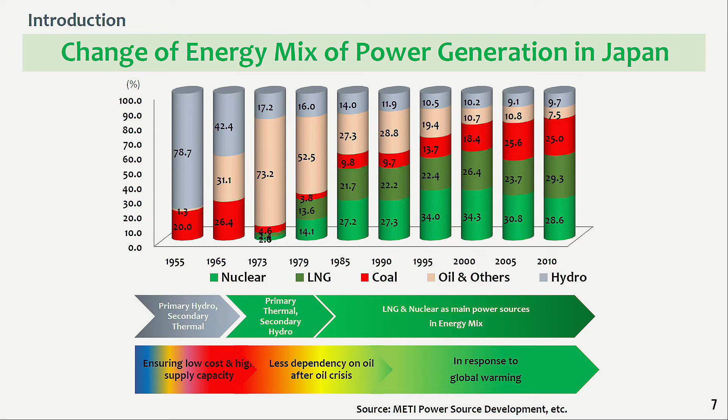And from the late 1990s, the global warming issue came out as a new and common challenge in the world. As a result, the energy mix of power generation in 2010 had reached nuclear 28.6, LNG 29.3, coal 25, oil and others 7.5, and hydro 9.7. I think this figure might be one of the best energy mixes of Japan at that time. This introduction aside, I would like to move to the first topic of nuclear power development of Japan.

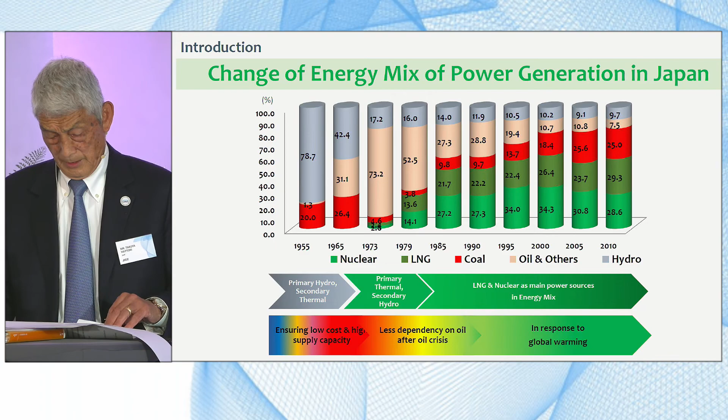That is very important: collaboration of government, industry, and academia. It's very amazing. 1955 is 10 years after the disaster of the atomic bombs in Hiroshima and Nagasaki in 1945. It's very amazing that the Japanese general public accepted to officially start nuclear.

This slide shows a schematic overview of the history, focusing on the number of nuclear power units every 10 years from 1960 to 2010. You can understand that Japan has steadily and smoothly developed nuclear power within a short period of time, and the severe nuclear accidents at TMI and Chernobyl did not affect the nuclear development program in Japan so much.

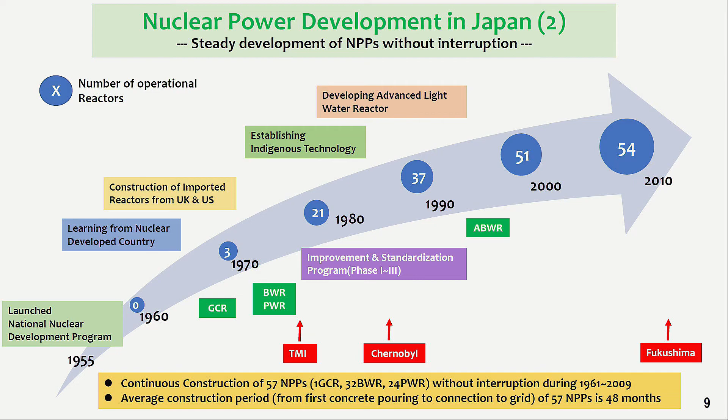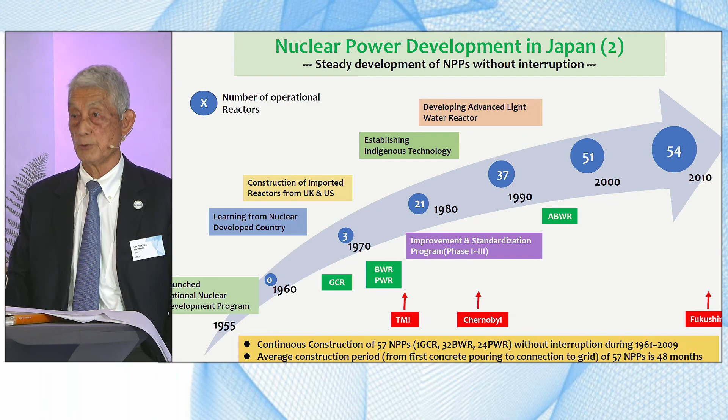Here, I'd like to stress the following 2 characteristic points of nuclear power development in Japan, shown at the bottom. The first is the continuous construction of 57 nuclear power plants without interruption. This is a very rare case in the world. And the second is that the average construction period of the 57 nuclear power plants is 48 months. This is very short compared with other countries. I'd like to show the comparison in the next slide.

As I mentioned in the previous slide, the construction period of nuclear power plants in Japan is relatively shorter than that of other countries. This slide shows the comparison of construction periods of major nuclear countries in the past, based on the IAEA database. Because of the time constraint, I won't explain in detail today, but I may have a chance in the future to talk about why Japan is shorter than other countries, if you are interested in this matter.

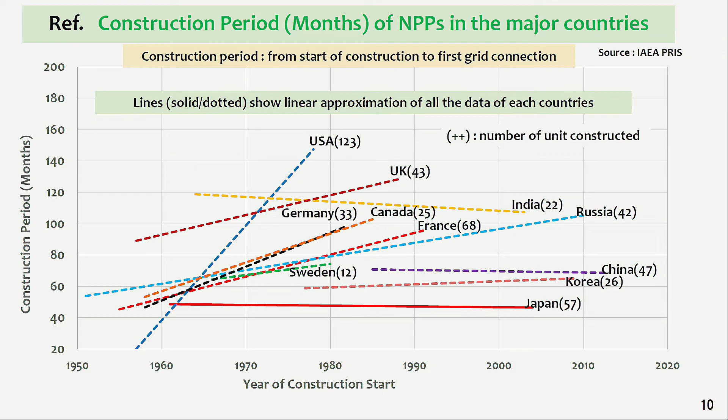In addition to the previous slide, I'd like to show other data on the construction period of Generation 3 and 3+ reactors, which started operation recently. As you might know, the most important challenge and risk of new reactor construction is to prevent cost overrun due to delays in the construction schedule.

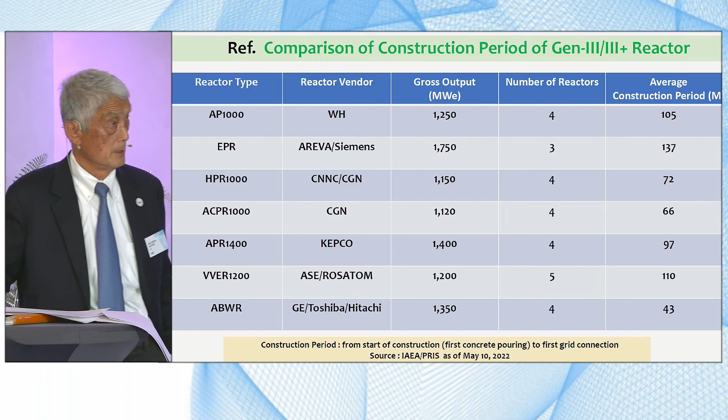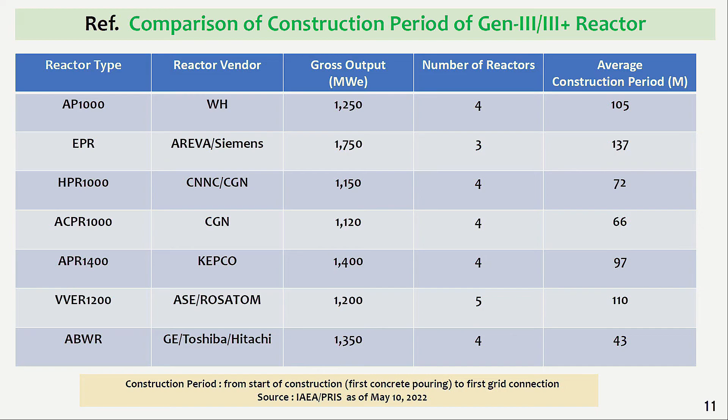Until now, the number of reactors of each type of Generation 3 or 3+ is limited, as shown in this slide. However, we have to realize this reality, and the world nuclear community has to continue to make efforts to shorten construction periods as much as possible. Very unfortunately, the AP1000, EPR, Hualong, ACPR, APR1400, and VVER are all a very limited number, but with a very long period of time. But in the case of the ABWR in Japan, 43 is amazing. I can show the reason why, but today I'm not talking about that.

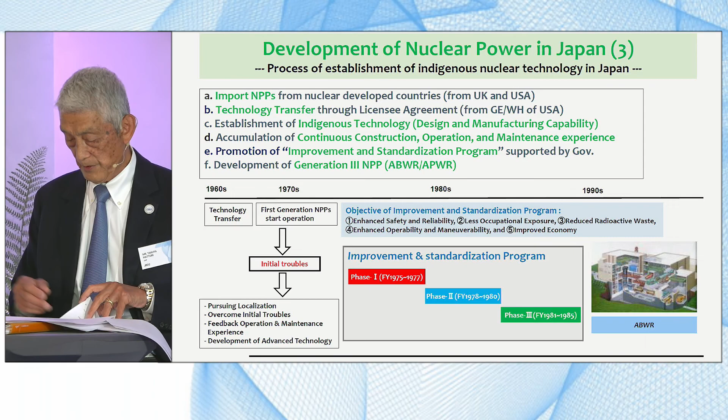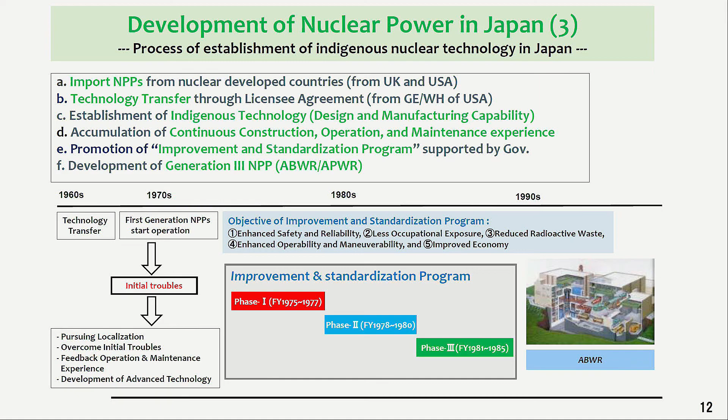This slide shows the process of establishment of indigenous nuclear technology in Japan, with the strong support of the government and close collaboration between government, industry, and academia. Initially, nuclear technologies were imported from nuclear developed countries like the UK and the United States. And then these technologies were customized, improved, and transformed into indigenous technologies through Japanese operation and maintenance practice. I won't talk about this in detail, but you can ask if you have any questions afterwards.

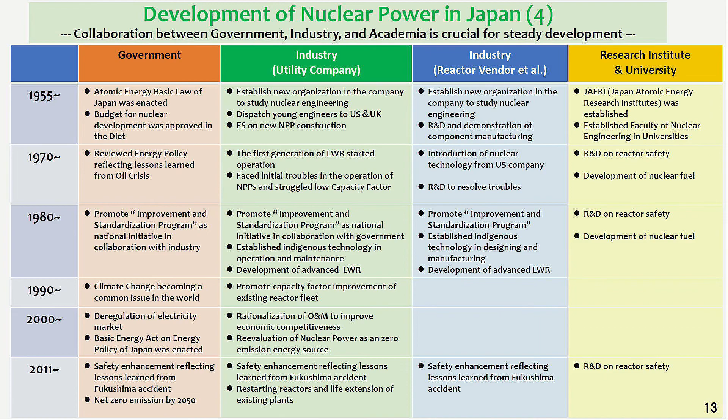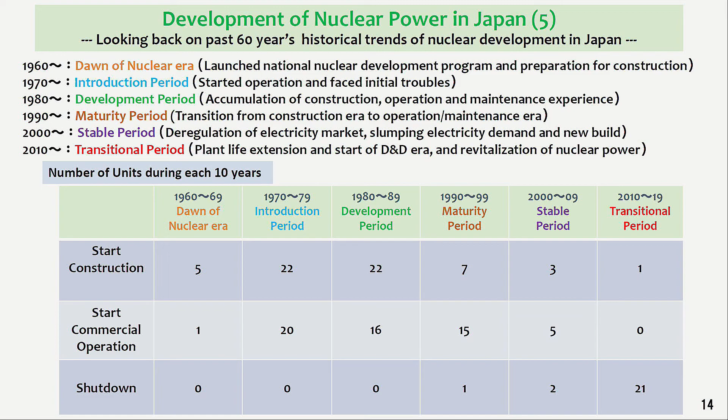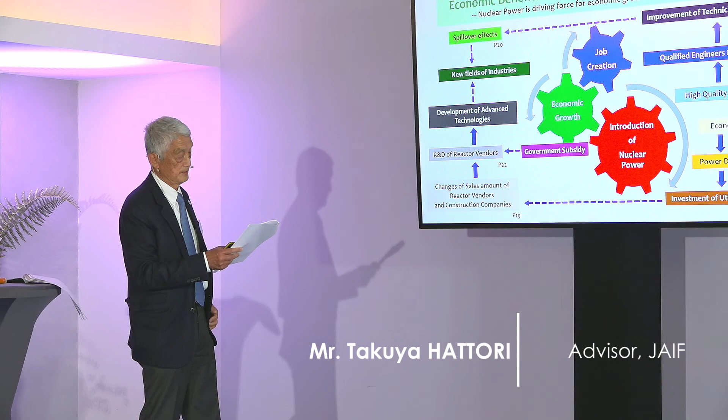As I mentioned, with economic growth, power demand increases, and utility companies invest, and the sales amount is going up, and R&D starts. Also, for nuclear power, keeping safety is the highest priority. So quality management capability is crucial, promoting education and training of young engineers and workers to generate qualified personnel for improvement of technical capabilities. This movement is also expected to produce spillover effect to new fields of industry.

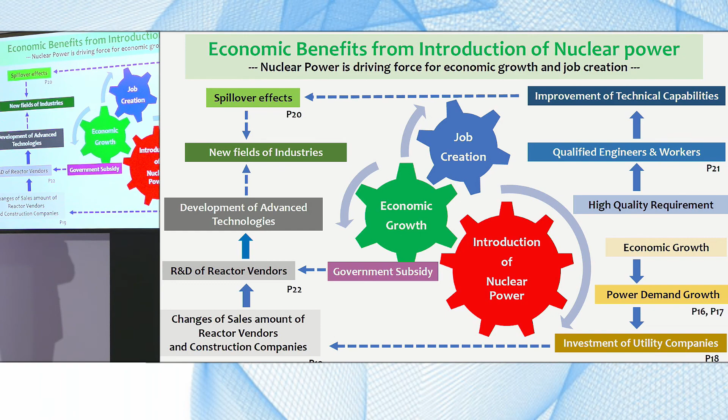And this page is related to the pages I will talk about afterwards. This slide shows the transition of the nuclear power capacity in Japan. You can see how quickly nuclear capacity increased from 1970 to 1980. The green graph shows how rapidly the capacity increased.

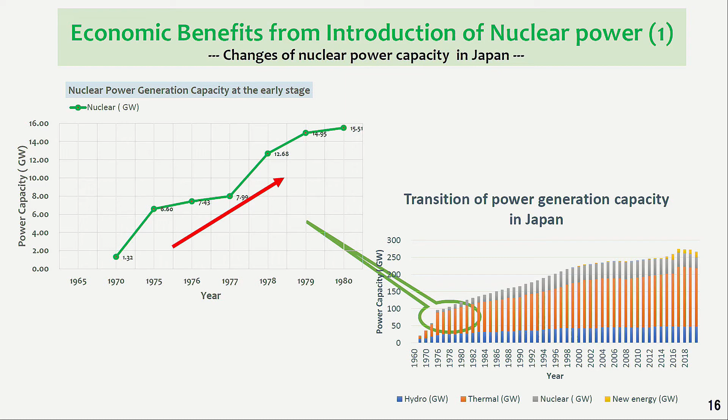After introduction, we consider the economy of scale. At first, it's very risky. After customizing, after that, we have to consider it. First, you have to go the conservative way. That is a very, very important point.

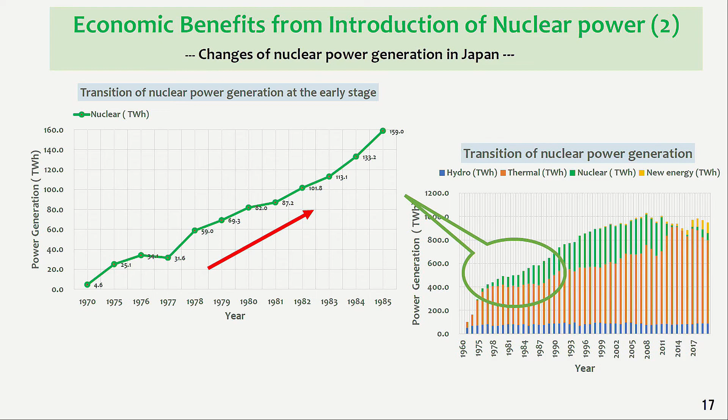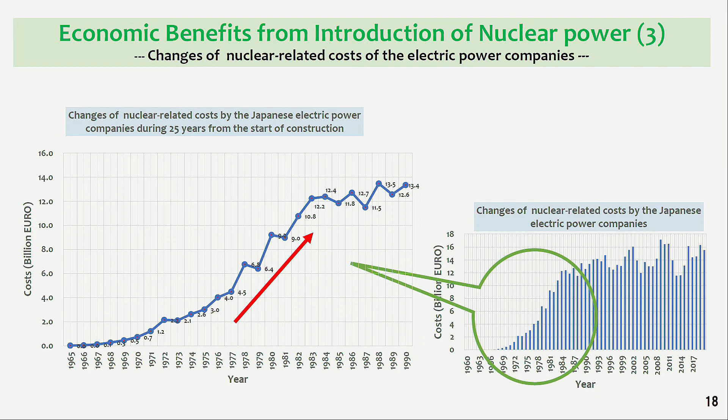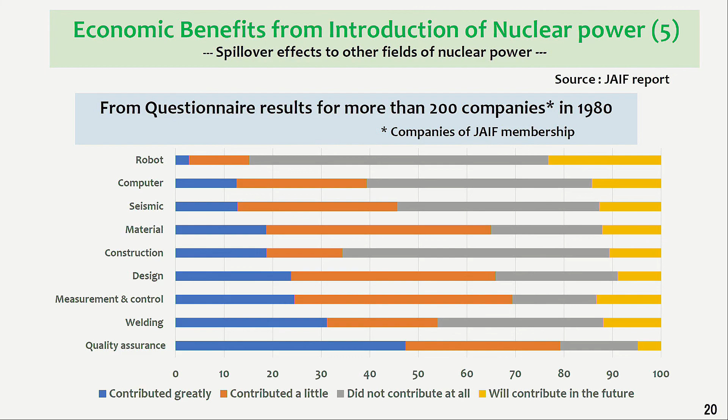So I suppose their feedback on the questionnaire might be a good reference to evaluate the spillover effect of nuclear power from the current point of view. Each item reflects the 1980s timing. At that time robots were not so popular, and computers had just started. And seismic, materials, and construction are very much the same as at present.

And measurement and control has very much improved since that time. Welding is the same; this is a very basic technology. And quality assurance is almost the same as at that time.

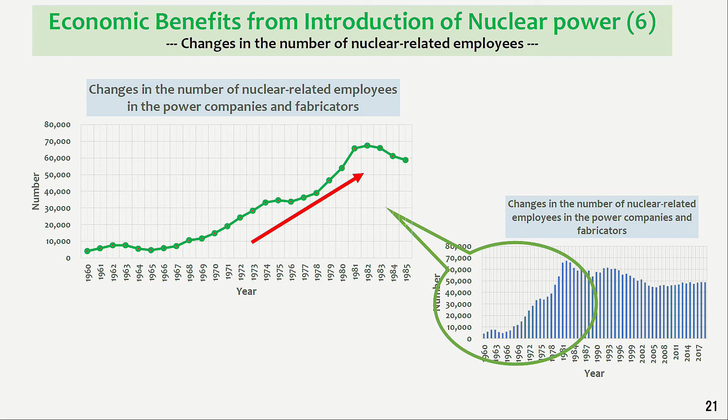The ratio of local workers at construction sites is different for each site, but it can be said that it is about 2/3 in the case of utility companies and 1/3 in the case of reactor vendors. It depends on each company's policies, but a large portion is local workers working at the construction site.

This is very different from maybe other countries. Corrective maintenance or preventive maintenance: in our case, we choose preventive maintenance. This is very important for getting the trust of the local community, to prevent even very minor troubles.